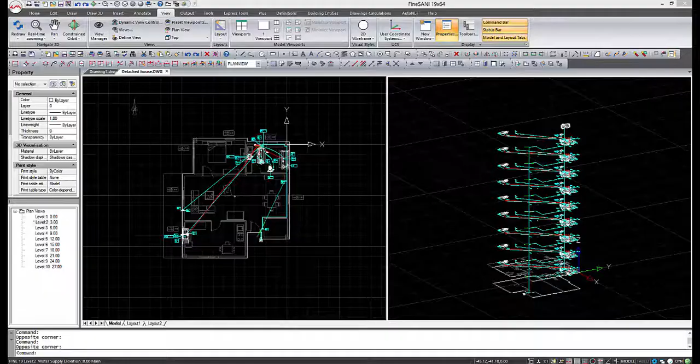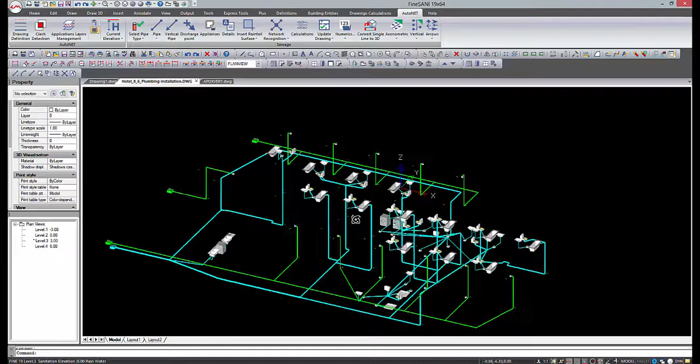4M launches the brand new version of FINE SANI 19 standalone software platform. FINE SANI is a powerful workstation for water supply and sewage projects, which automatically performs the necessary hydraulic calculations directly from the drawings, producing all project results such as calculation issue, technical descriptions, full-scale drawings and bill of materials. FINE SANI automates the designing process, providing the user with appropriate installation designing solutions.

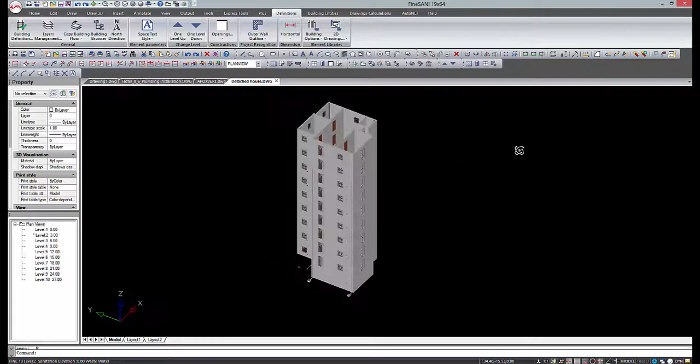Let's watch a quick overview of this software in a simple project. A water supply system can be drawn in one dimension so that it can be identified and transferred to the calculation sheet automatically.

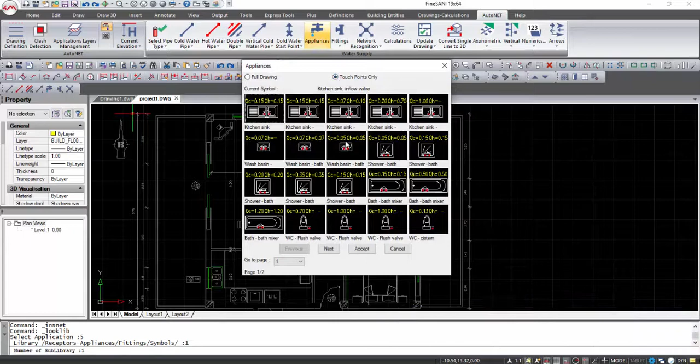The first step is to place the receptors' position manually. Although the user inserts them in 2D dimensions, the appliances can be displayed with 3D dimensional features.

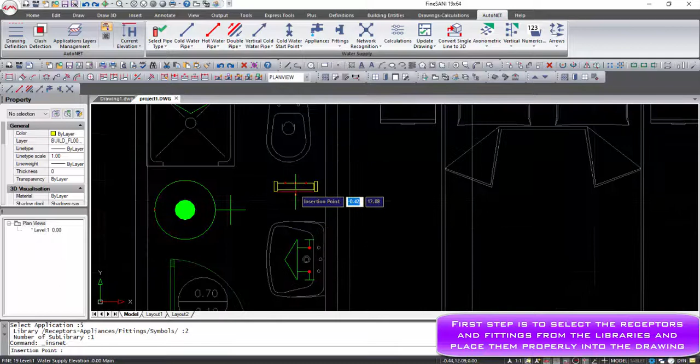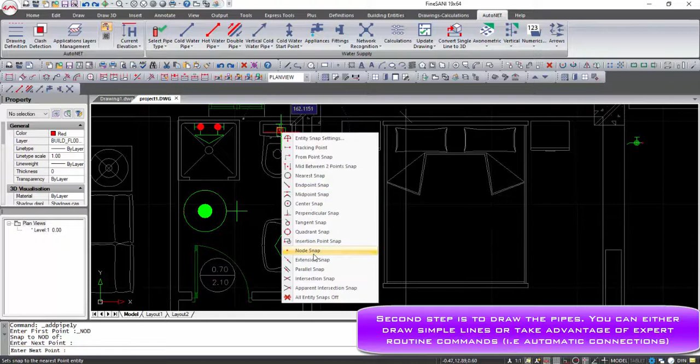After that, we determine the cold and hot water pipes with single lines and connect them with distributors and receptors. The above procedure should be followed separately for the cold and hot water network.

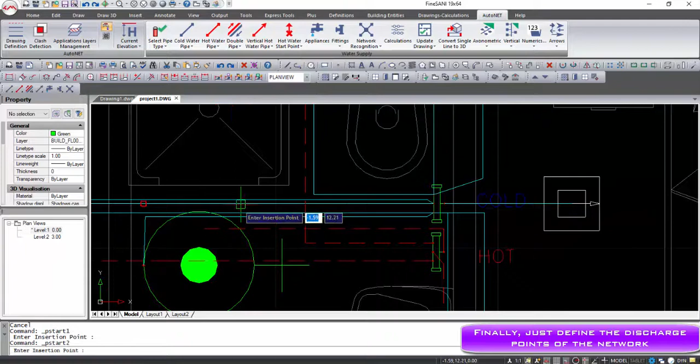Since the network has been drawn, the network recognition command informs the user of potential problems in the network, such as disconnected segments or short circuits.

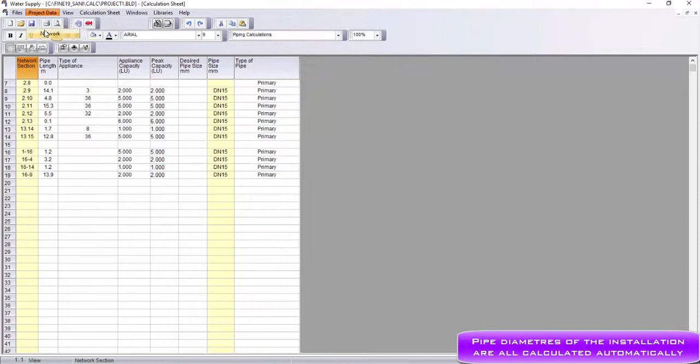In addition, junction points and receptors are numbered on the ground plan, and in this way we can proceed to the calculation module. It has to be noticed that the numbering of the sections, the lengths of the network sections, the receptors with their supplies, and the fittings from the piping routing are transferred in the calculation sheet.

The application integrates a variety of calculation methods with just one click.

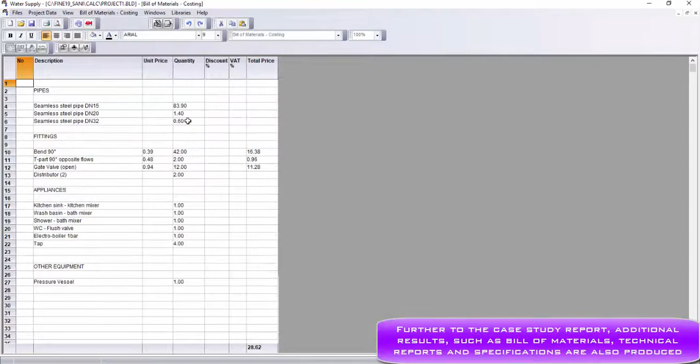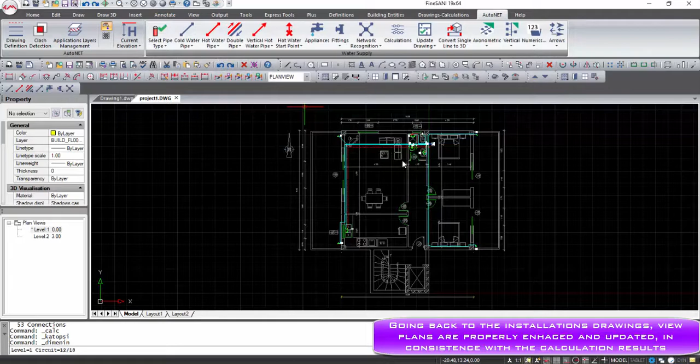After the calculation part is completed, the Update Drawing function can update drawings according to calculation parameters. Finally, the vertical diagram is created automatically, executing the corresponding command.

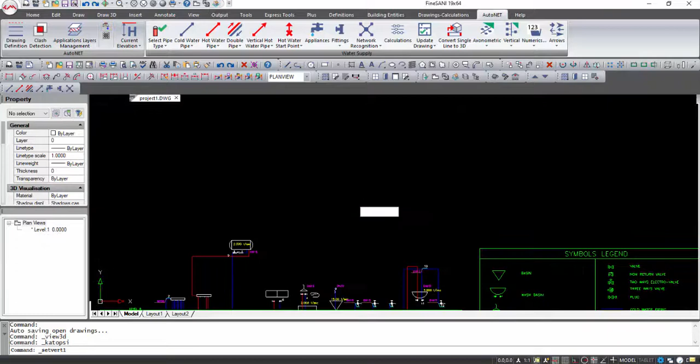After the drawing has been updated, you can convert the single lines to 3D pipes by executing this command. As indicated, the dimension of the 3D pipes is related to the calculation results.

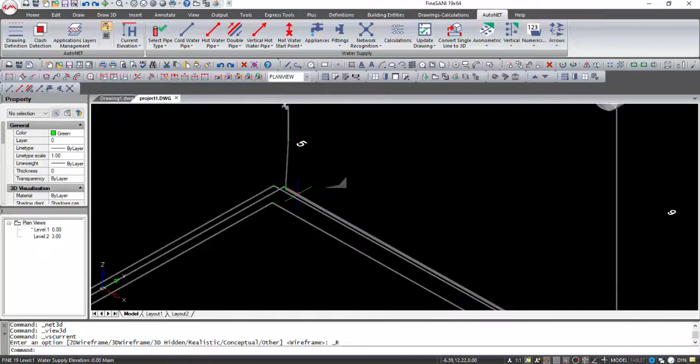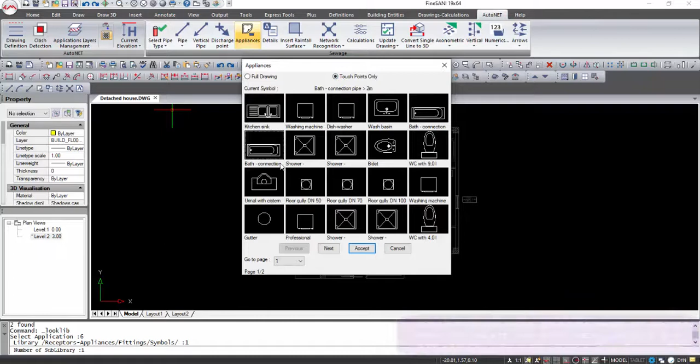By selecting AutoNET Sewage, the menu is modified to provide all the functions and commands for a sewage network. The appliances are placed as referred earlier for the water supply application.

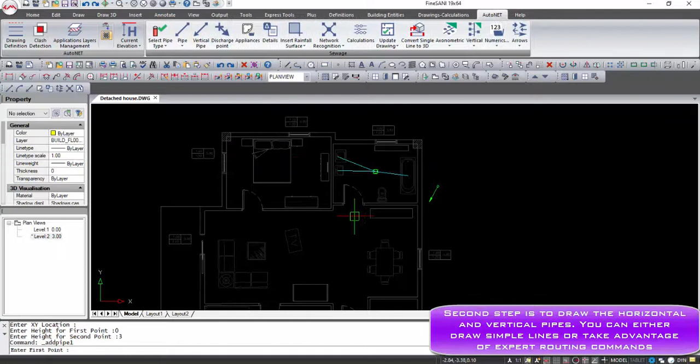The second step, connection of the piping to the appliances, is implemented using the node connection point in the piping group of commands. In order to minimize the time needed and the possibility of a drawing error, it is recommended to use the connect appliances with floor siphon, where possible.

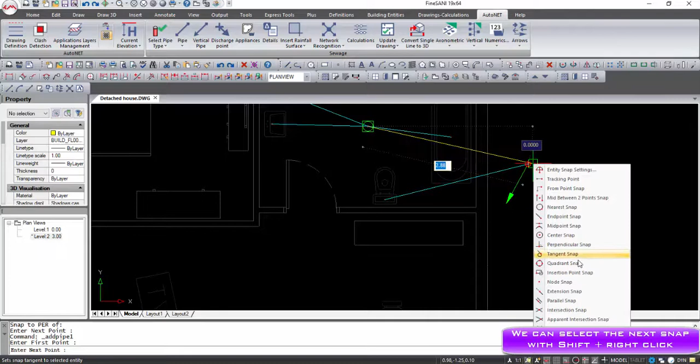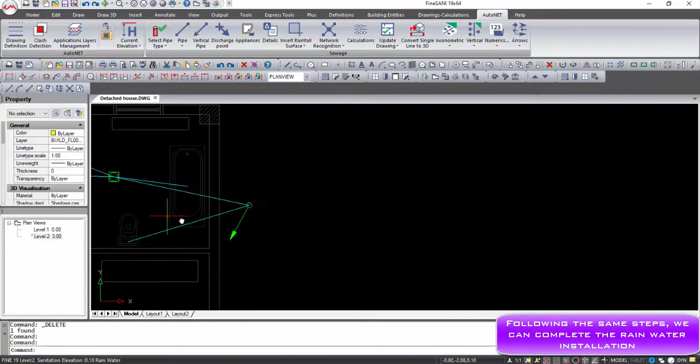Rainwater network can be designed following the same principles and defining rainwater surfaces.

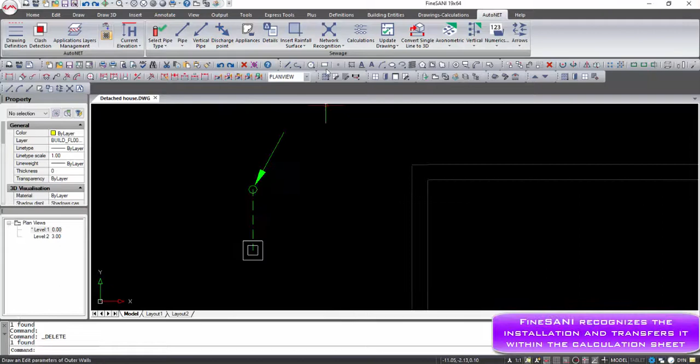Select the Network Recognition command in order to recognize the network, as well as the position of the appliances in the spaces, and to prepare the files for the connection with the calculations.

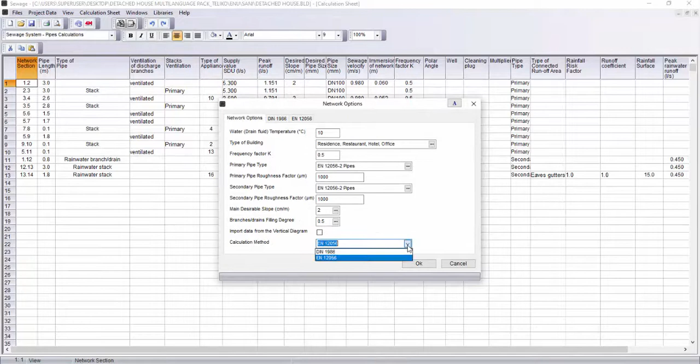It is crucial that calculations are performed in compliance with all renowned standards.

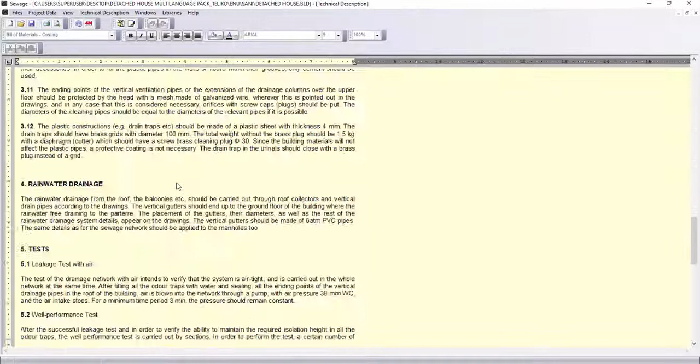Drawings are updated automatically with labels according to calculating results.

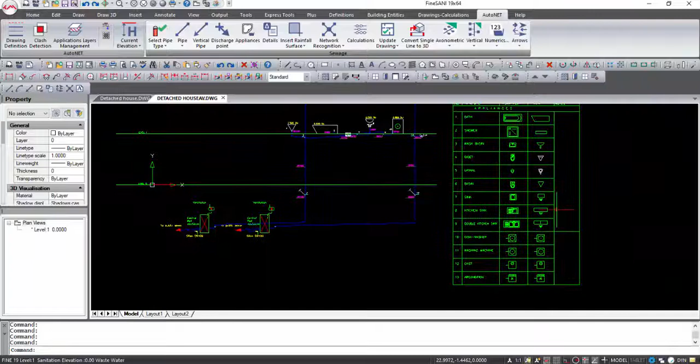At the end, it is impressive that single-line drawings are converted to 3D real dimensions.